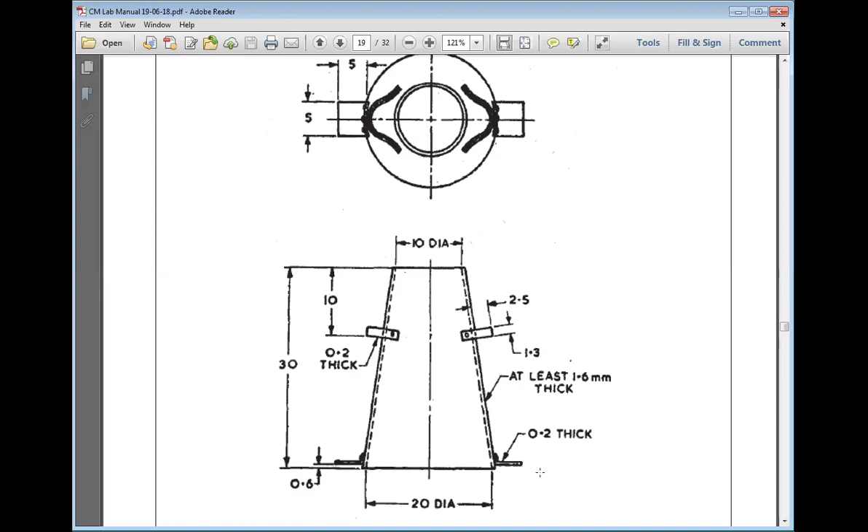Regarding the procedure, when we measure workability, there is no standard limit or value as such, no particular fixed unit, but we approach each test with different units. For example, in a slump cone test, the answer will be in the form of mm. In the next experiment we'll also see workability, which will have a different unit.

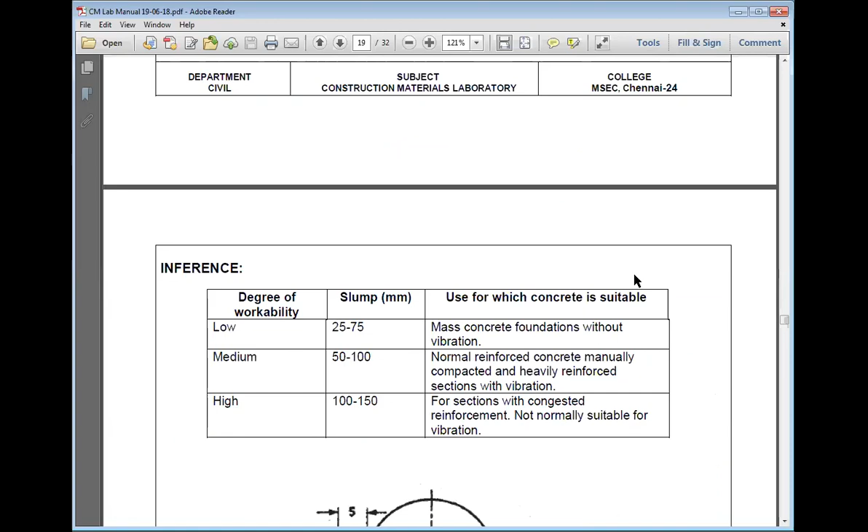Before that, let's revise the slump cone once more. What is the procedure involved?

In the selection of material, in terms of aggregate, the maximum size should not exceed 38 mm, and the internal surface of the mold should be cleaned before pouring the concrete. They clean it by pouring oil and wiping it.

After that you place it on a non-absorbent surface. Where the cone is placed, the flat surface should not have any impurities.

Now we can pour the fresh concrete in 4 layers. Just like how we fill the mold layer by layer and tamp 25 times for aggregate, here also we fill it in 4 layers. For each layer you need to do 25 tampings in order to induce the compaction.

After this is done, you level the surface. After leveling, you carefully remove the mold exactly vertically, because while removing the mold we should not disturb the concrete inside. Without disturbing it, you must lift it vertically.

In this case, depending on the workability level or stiffness, the concrete will subside, meaning it will fall. The measure of the fall is determined using a ruler, that is a scale. The difference in level between the height of the mold and the highest point of the subsided concrete is measured, as we've seen in pictures already. The unit is measured in mm, that is the height.

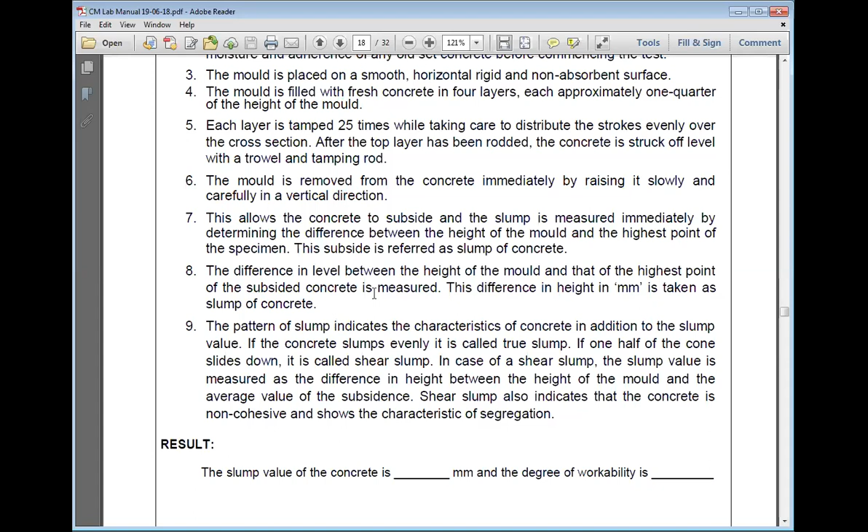Using this method, concrete slump can be categorized into 3 types. The first one is called true slump, the second is called shear slump, and the third is called collapse. Here we focus on the first two types.

What is true slump? If the concrete slumps evenly, it is called true slump. It does subside, but if it subsides evenly around the circumference, that is true slump. But if, in our frustum of cone, only one side slides down - that is, one half of the cone slides down, not the entire cone - then it is called a shear slump.

In that kind of case, when measuring the difference, you need to take the average value of subsidence in case of shear slump.

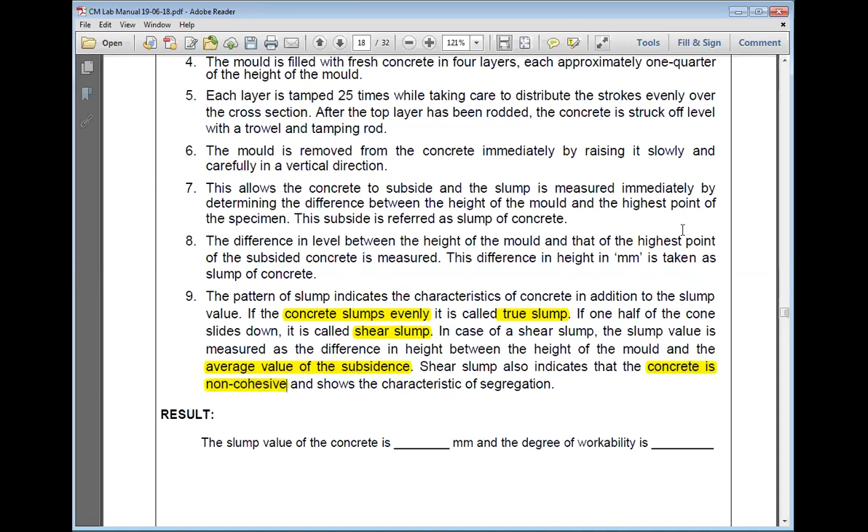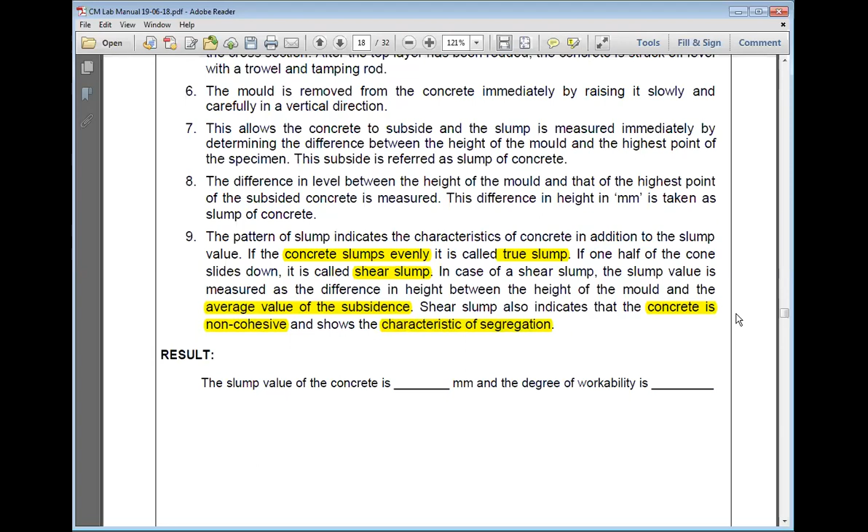What is the difference between true slump and shear slump? In terms of shear slump, it indicates that the concrete is non-cohesive, meaning it will not be sticky. In that situation, it signifies the characteristic of segregation. So we need to avoid shear slump while using the concrete.

True slump is what we must achieve. So what is true slump? The concrete cone should slump evenly. So when we write our result, we write: slump cone value is dash mm, and the degree of workability is dash.

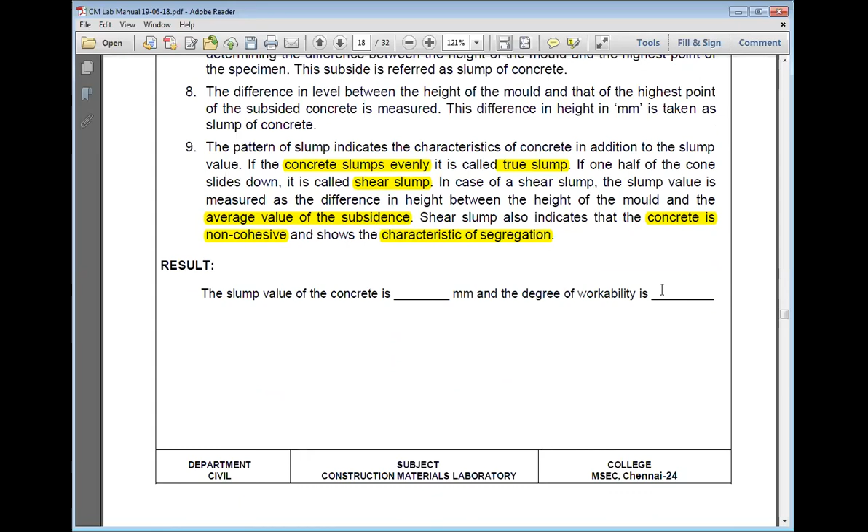In this place we need to mark the inference based on the slump value - what characteristic our concrete has, that is, whether the workability is high, moderate or poor, and so on.

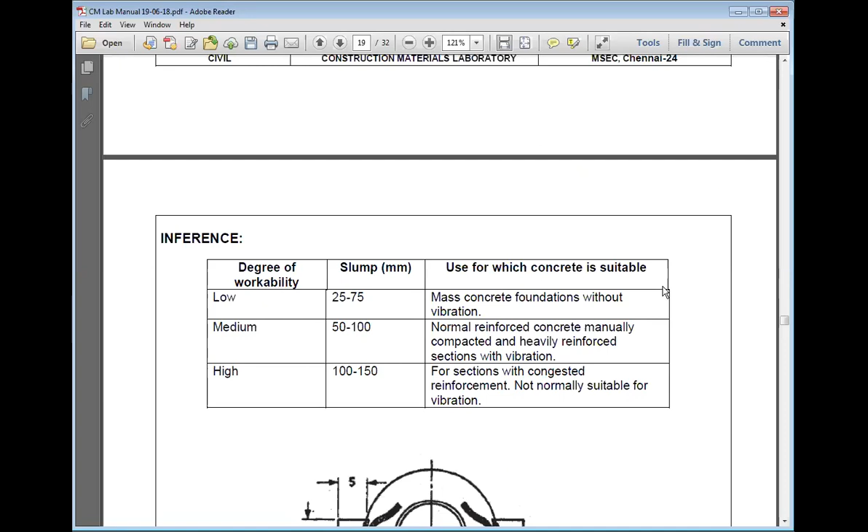In terms of application, a low workable concrete will have a slump of 25 up to 75 mm. There's a chance it can go up to 75 mm for a low workable concrete. In that, stiffness will obviously be higher.

Since stiffness is higher, you can use it in mass concrete foundations without vibration. In a medium workable concrete, it is around 50 to 100, which can be used in reinforced cement concrete, and we can do manual compaction. In heavy reinforcement, we can do vibrations.

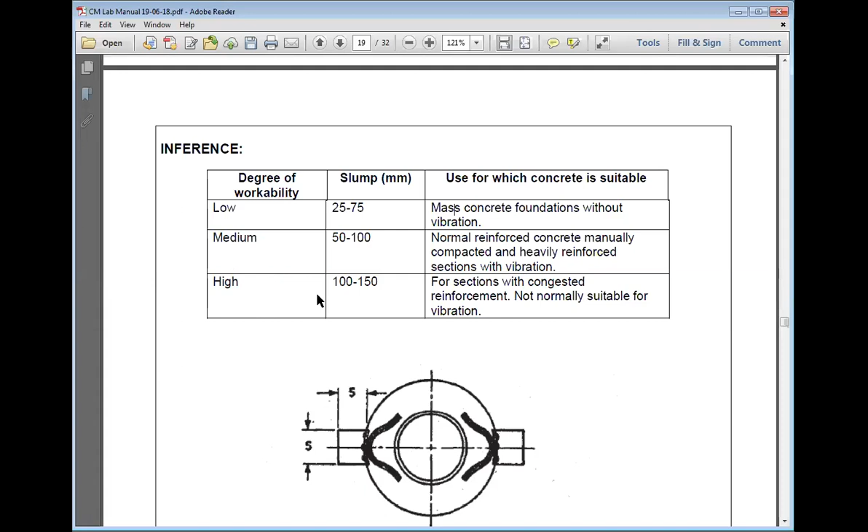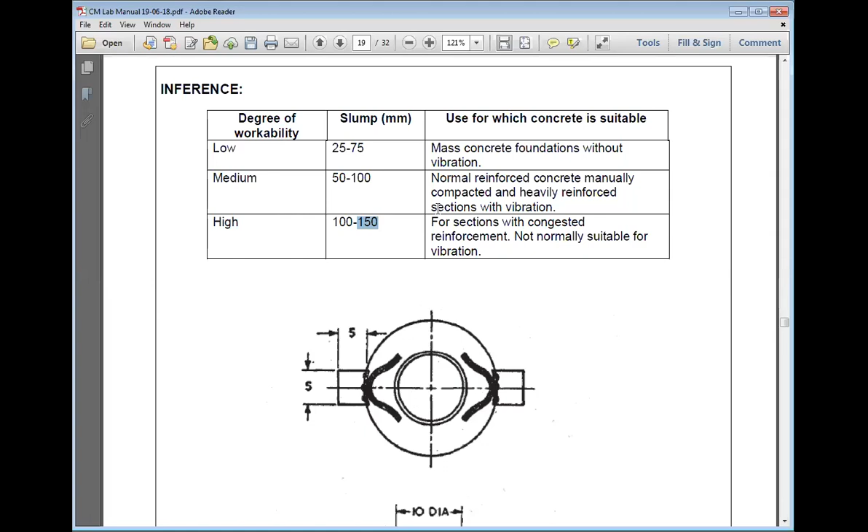In case of high workability, the slump value will be more, 100 to 150 mm. The slump cone's maximum height is 30 cm, that is 300mm. When we fill concrete in a 300mm cone, up to maximum 150mm can subside, that is fall evenly - half of the height comes down. When it descends like that, the cone at the bottom spreads evenly and surrounds uniformly.

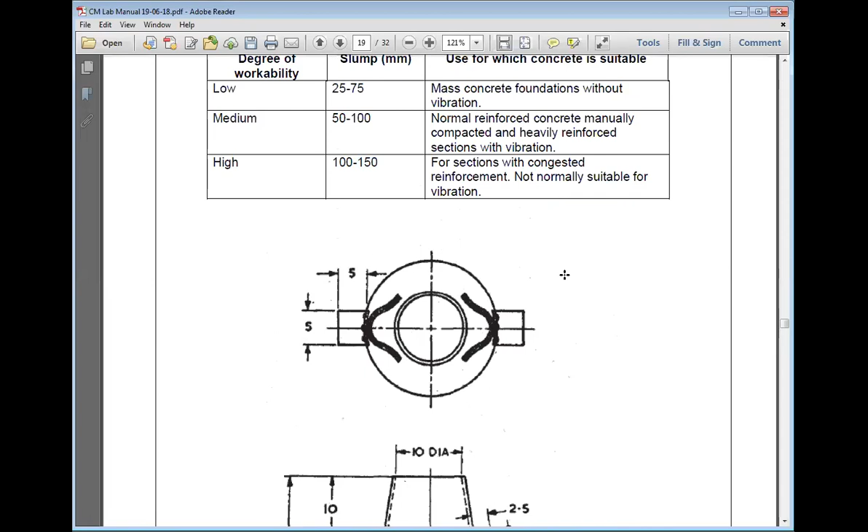In this case, it is normally not suitable for vibration because the concrete flows on its own. When it flows by itself, there is no necessity for vibration. This is how you interpret the slump cone test.

Workability has more than one test to measure the same property, as mentioned before. The impact of this is, while mixing the concrete mix design - what does that mean - for a grade of concrete we need to find the mix proportion: how much quantity of cement, fine aggregate, coarse aggregate and water required for concreting. To find that, knowing how much workability is needed is very important.

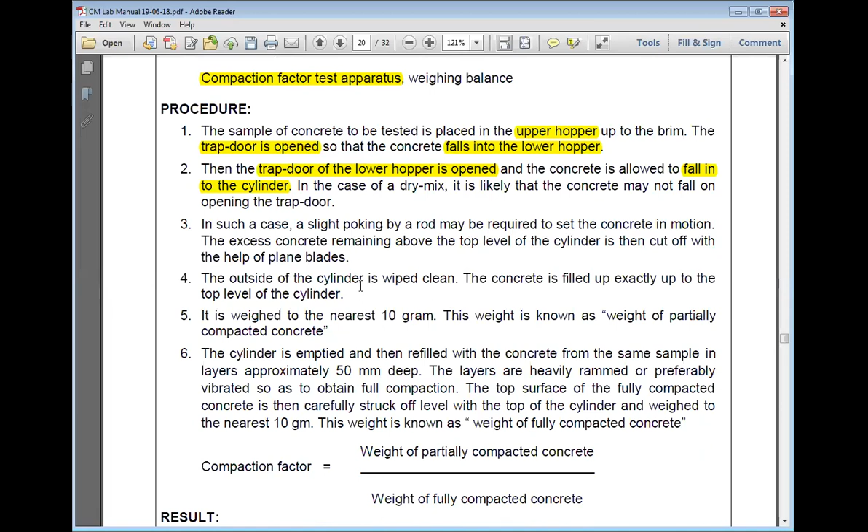This weight will be called partially compacted concrete. What is partially compacted concrete here? Since no vibration was given for full compaction, and the concrete fell only by gravitational force from the upper hopper, to the lower hopper, and then to the cylinder, the weight of concrete in the cylinder is the weight of partially compacted concrete.

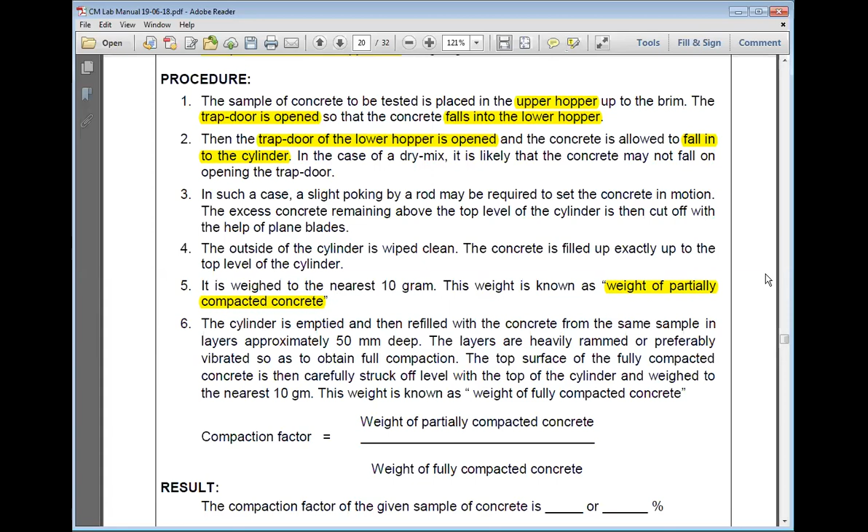So this parameter value should be taken as the numerator in our formula. Look at the compaction factor formula - the numerator is just the weight of partially compacted concrete. That is what we found as the numerator value.

Then what is the denominator? Weight of fully compacted concrete. To find this denominator we need to continue our experiment with a second trial.

But when doing the second trial, there is a difference. Instead of partially compacting the concrete, you are going to compact it manually so that after vibrations or tamping, the concrete obtains full compaction. You are ensuring full compaction - that is, as the concrete falls into the cylinder, you are tamping it 25 times.

In the second trial, instead of using the upper hopper and lower hopper, you take the same concrete and, similar to how we tamp the slump cone 25 times in 4 layers while filling, you perform the manual compaction process to obtain full compaction.

In this case, you are going to measure some weight, right? That will be called the weight of fully compacted concrete.

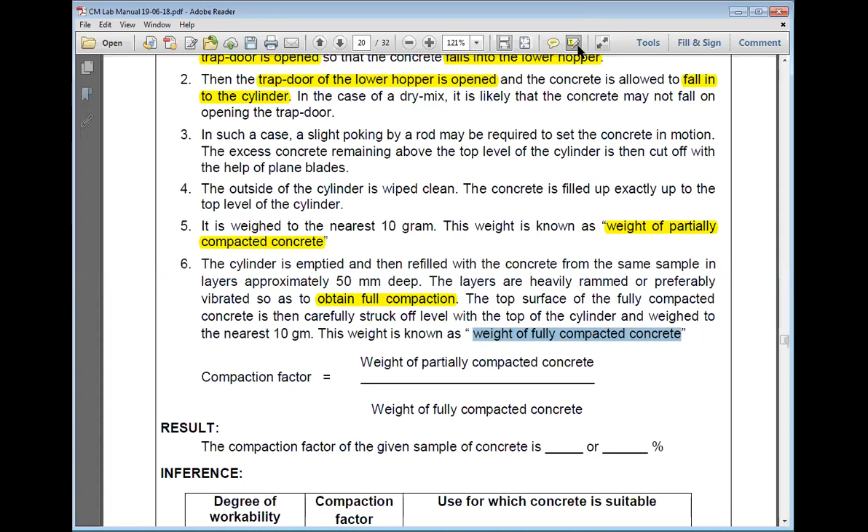So to find the numerator, we use the entire apparatus - upper hopper, lower hopper and cylinder. To find the denominator, we only need the cylinder - we don't need the upper hopper or lower hopper. We fill concrete manually in the cylinder and tamp it 25 times to find the weight of fully compacted concrete.

Now, depending on the stiffness or workability of the concrete, your compaction factor value will vary. Correct? For example, if your concrete is dry, will the compaction factor be more or less?

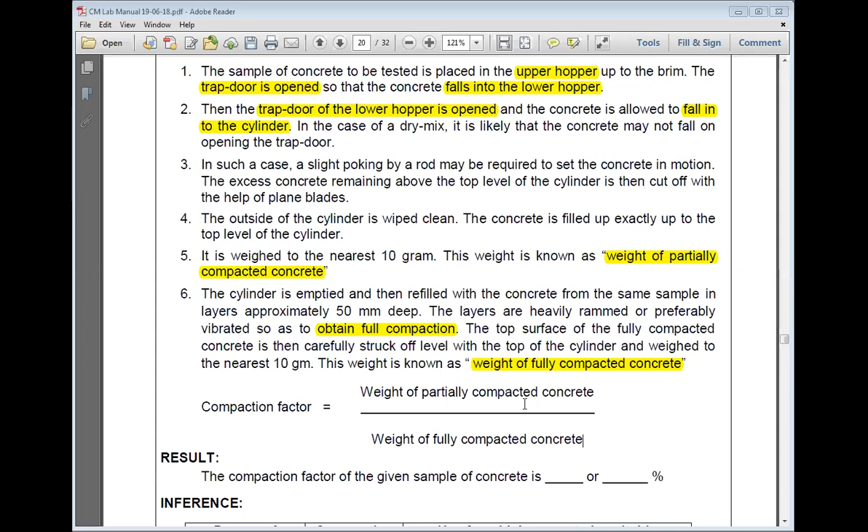So here, based on the degree of workability or the compaction factor value, let's see what the degree of workability is and in which cases it is applied. Your value may range between 0.75 to 0.95 or 0.96. These are typical values given here for understanding. For example, if your concrete's compaction factor is 0.80, the degree of workability is very low.

What does that mean? Compared to full compaction, only 80% of partial compaction was achieved. That is the meaning - full compaction means 100%, and compared to that, partial compaction achieved only 80%.

If your value is above 0.85, the degree of workability is comparatively low. For 0.935, that is above 0.9, the degree of workability is medium. And if your concrete workability compaction factor is around 0.95, then the degree of workability is high.

In terms of vibration for compaction, a very low workable concrete can be used in roads with power operated machines since the stiffness is high. A low workable concrete can be applied in mass concrete without vibrations. Medium workable concrete is for reinforced cement concrete, and high workable concrete is for congested reinforcement without vibrations.

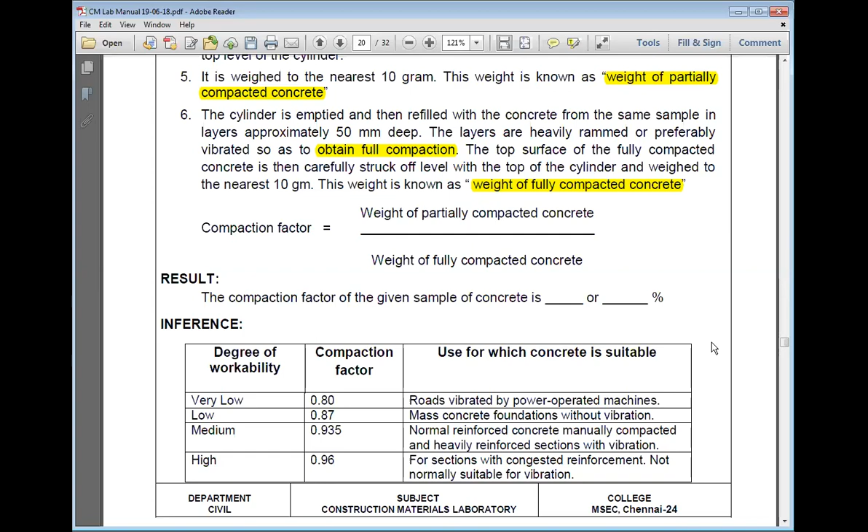So all these values are typical to understand the level of workability, how it varies, and the application area. This is how they may ask in Viva based on applications. And certainly about limitations of the test, they may definitely ask in Viva, or the significance of the test.

In terms of significance, you can say that compaction factor doesn't need to be used much; if it's for mix design, the slump cone test is primarily enough. And in terms of ease of use, slump cone is a much easier test when compared to compaction factor.

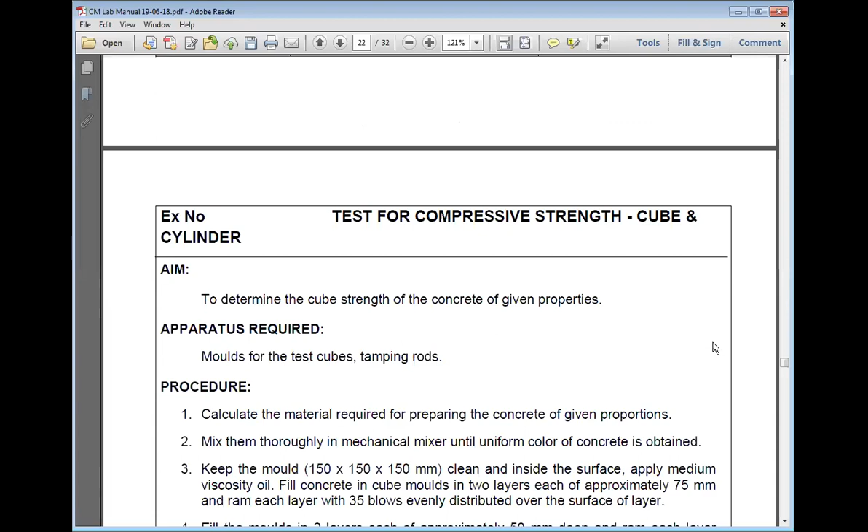Apart from that, the two tests we looked at are based on fresh concrete while it is in a plastic state. Suppose your concrete is in a hardened state, then what can we check? Compressive strength.

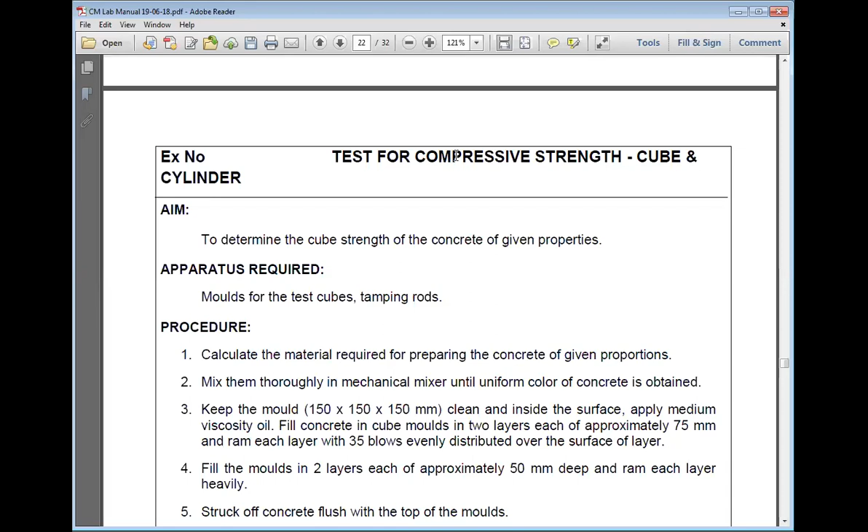Already you saw pictures many times, right? While applying the compressive load on the CTM machine between the compressive plates, you take a cube mold of 15 centimeter size, so a 15 by 15 by 15 cube is taken. In terms of mm, it is 150.

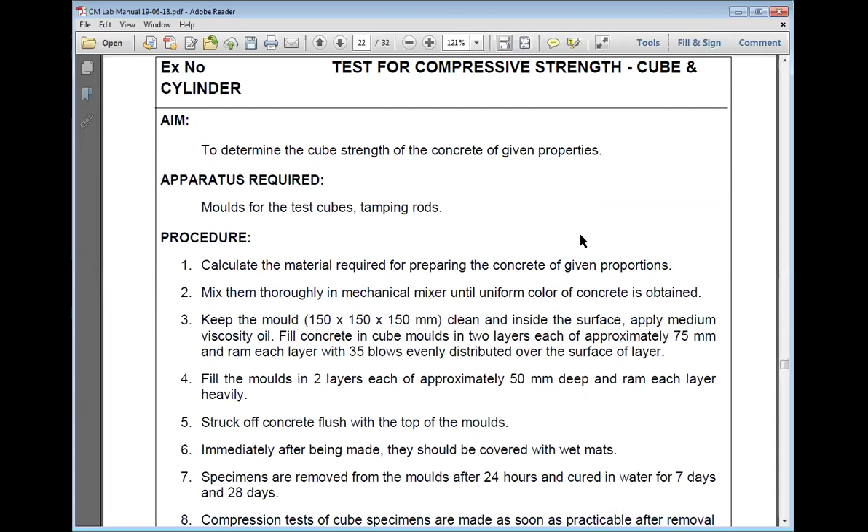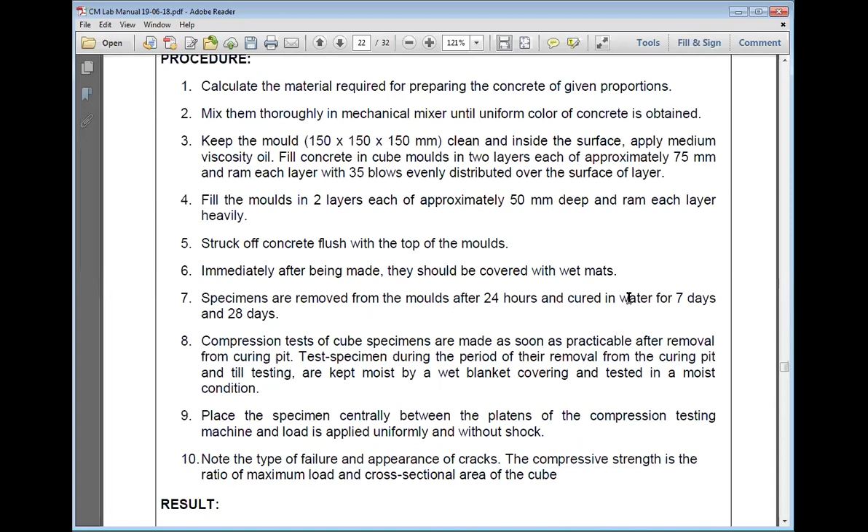So for that you take a mold. In that mold you fill the concrete, then you have to tamp it, compact it, then cure it. First at room temperature for 24 hours, then the remaining days in immersion of water. After that, you take the test specimen out and check it in the CTM machine.

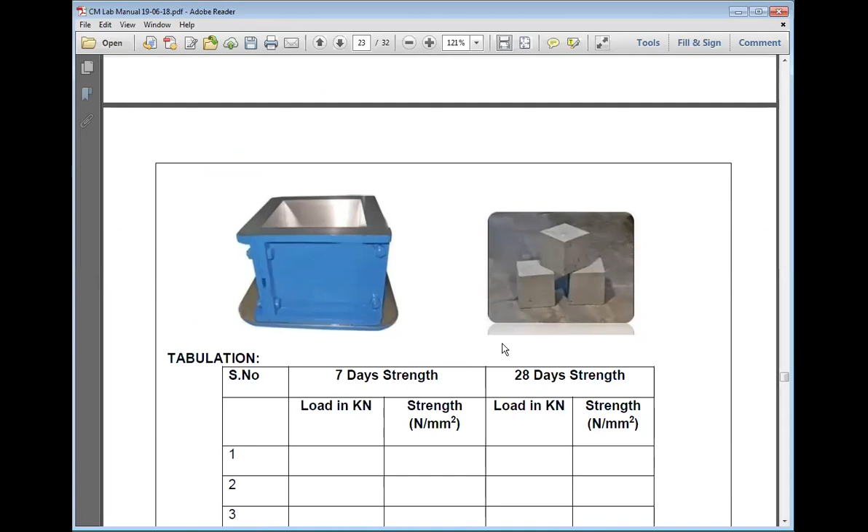For the tabulation, look at those pictures - on the left is the cube mold, on the right is molded concrete cubes after curing. So you take the load and values in kilonewton and the strength in Newton per mm square. For that we need the top area of the cube mold, which is 15 by 15 centimeter, or in mm, 150 mm by 150 mm.

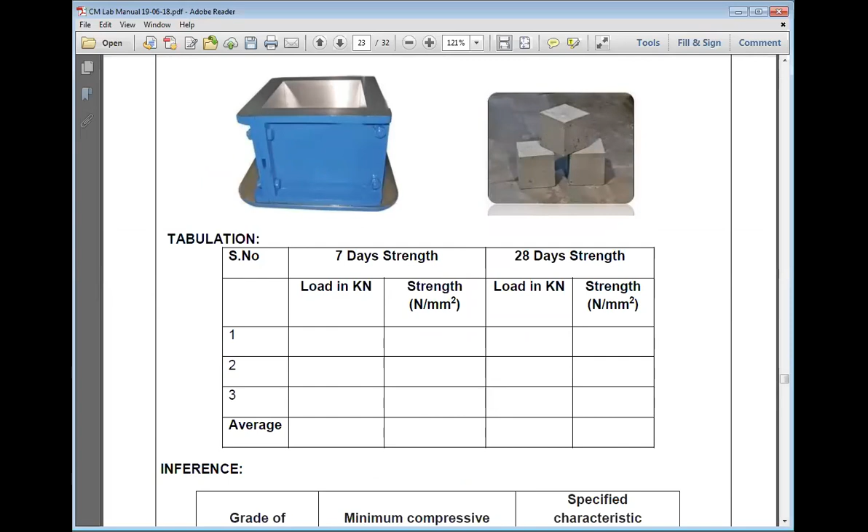In terms of grade of concrete, what strength should be obtained at 28 days? It is something with the same value as the grade. If you take 15, here also it will be 15. Suppose you take 35, here also it will be 35. That is for 28 day average compressive strength.

Now regarding minimum compressive strength at 7 days - since we cannot wait until 28 days, we check what value we get on the 7th day itself. If the value is within satisfactory limit, then automatically we can ensure that at 28 days also we will get the corresponding value.

For example, if you take M20 grade concrete, after 28 days you should get 20 Newton per mm square strength. But at the 7th day, you should get a minimum strength of 13.5. So suppose I take a 7 day cube, do 7 day curing and then test it - at that point of time, I should get a value of minimum 13.5 or more than that. That would ensure that after 28 days, we will get the required grade strength.

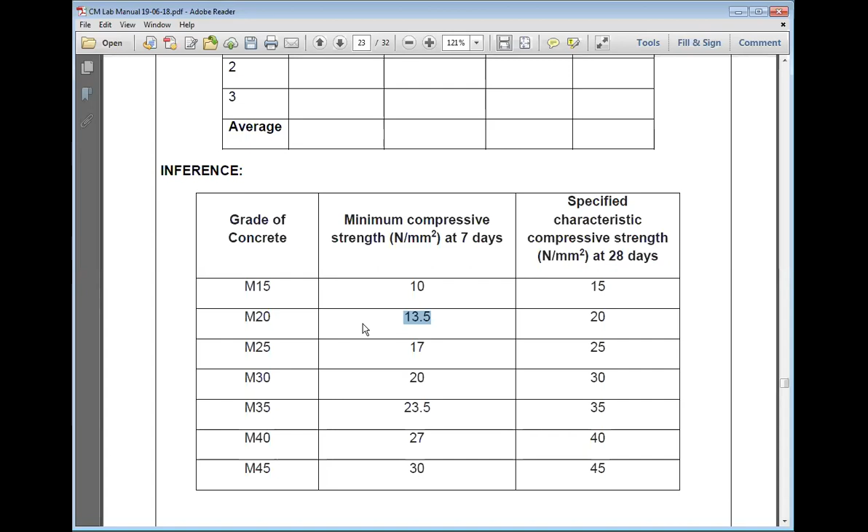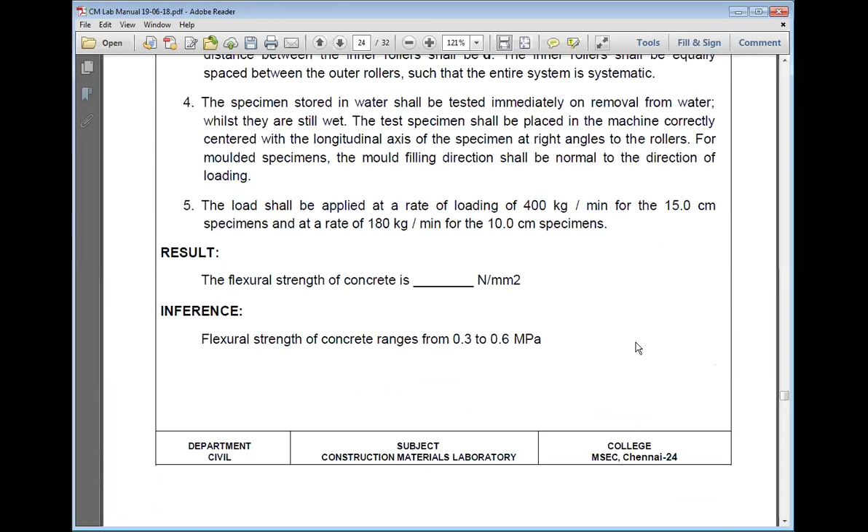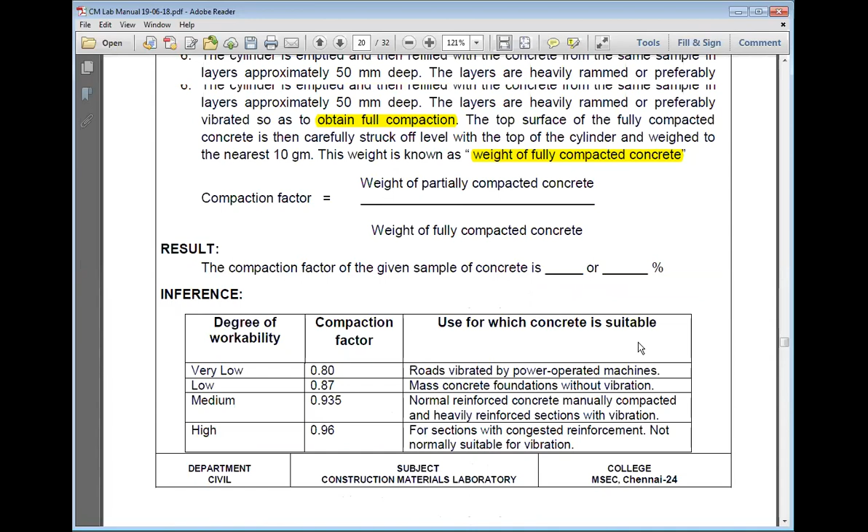Then another test regarding concrete is the beam test, that is the flexural strength test. We will discuss this later in detail, because we have some other methods of testing workability apart from slump cone and compaction factor. As far as the lab is concerned, only two methods exist - one is slump cone method, the other is compaction factor method for workability. Now we will see an overview of other methods.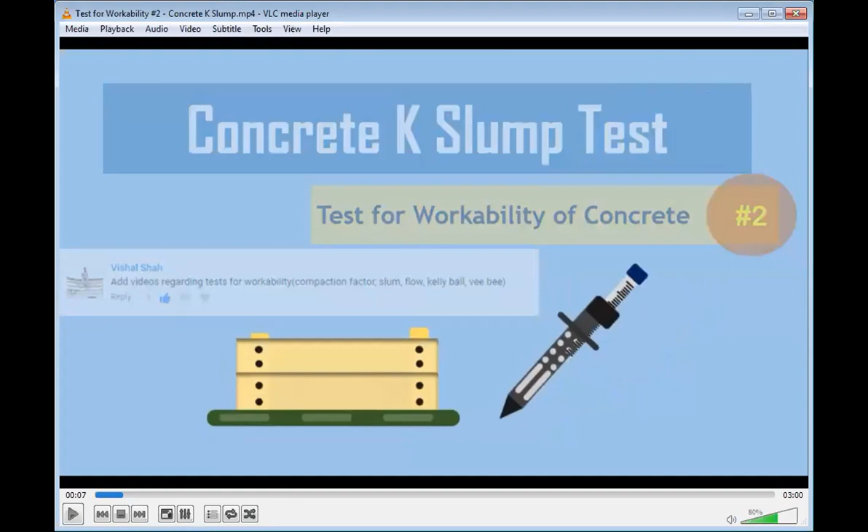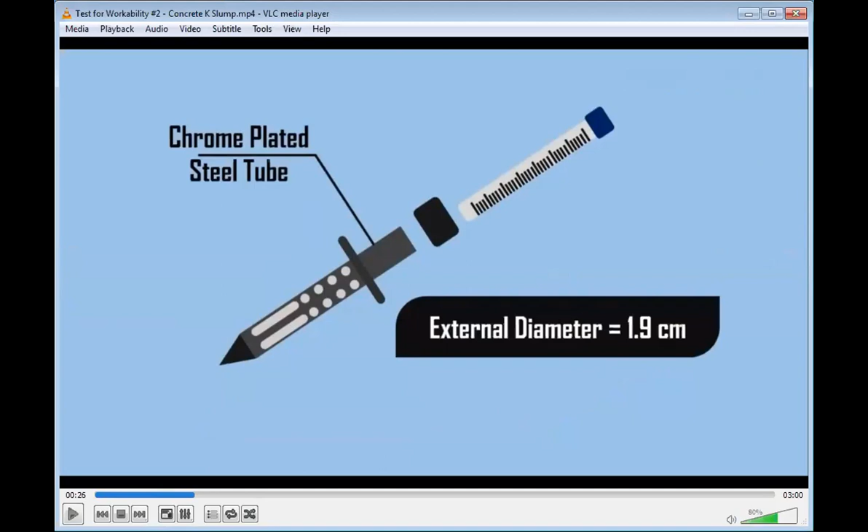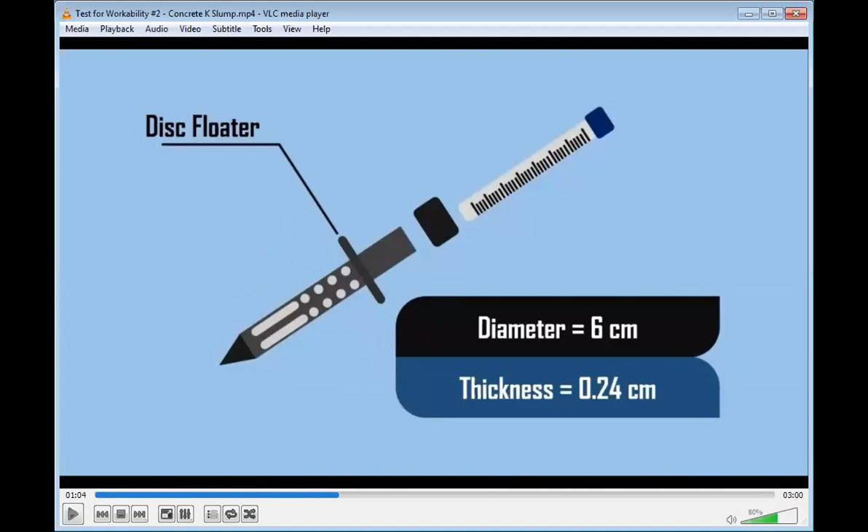So what do we have? A chrome plated steel tube of 1.9 cm. We won't focus much on the manual physical specifications, we'll focus on the main application. So it has a 25 cm depth, and at the bottom we have needle type arrangements, and also a disc floater of a particular 6 cm diameter and thickness.

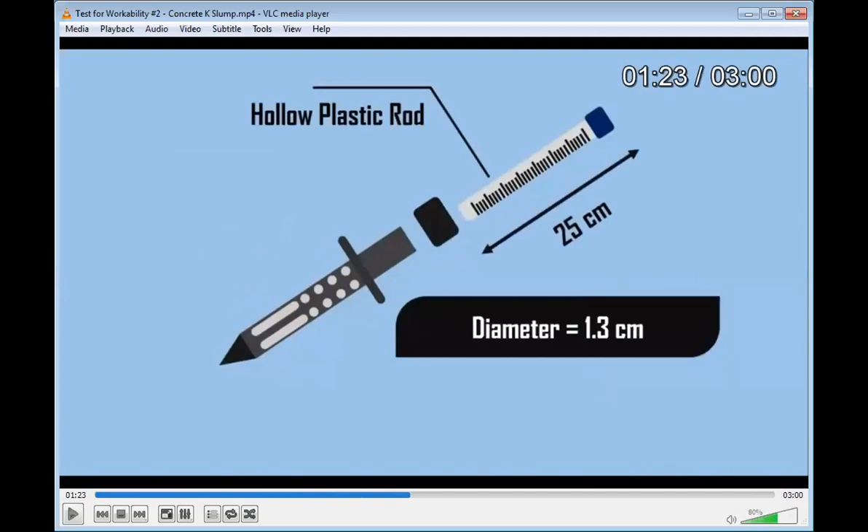So what we are going to do is, we also have a hollow plastic rod of 25 cm and aluminum cap of 3 cm. So we have a tube, float tube, aluminum cap, and the measuring gauge - that is a scale fitted inside.

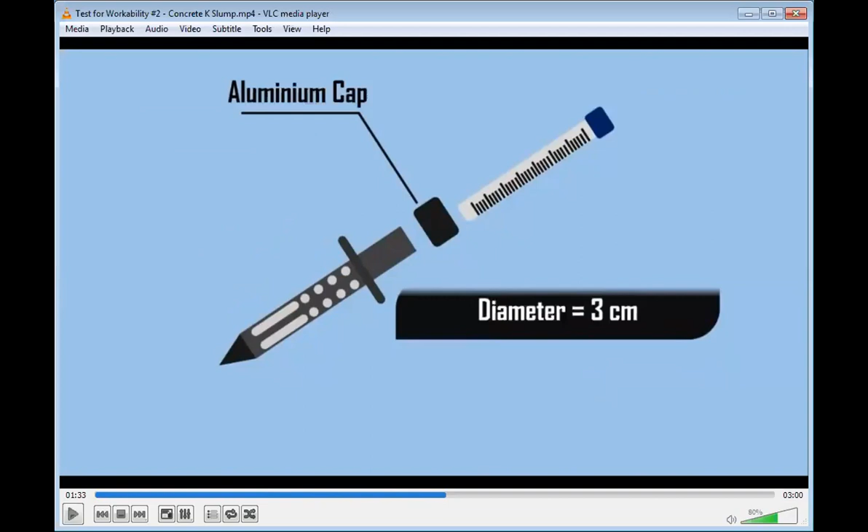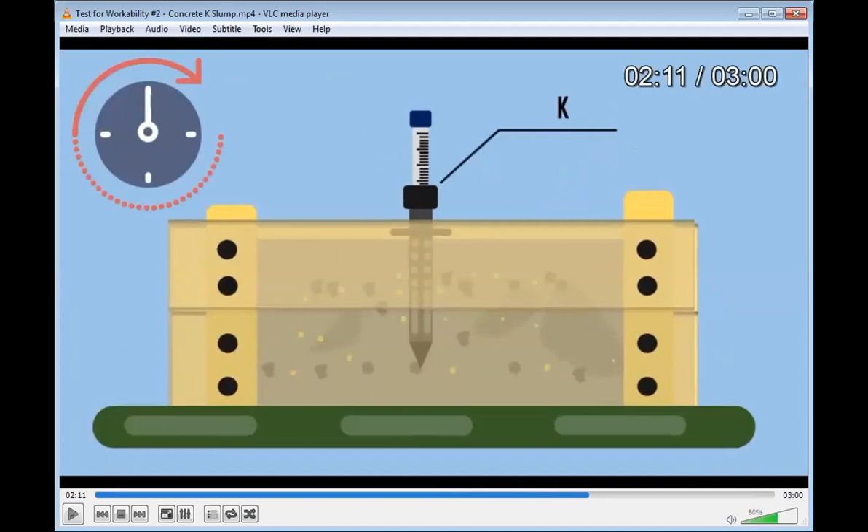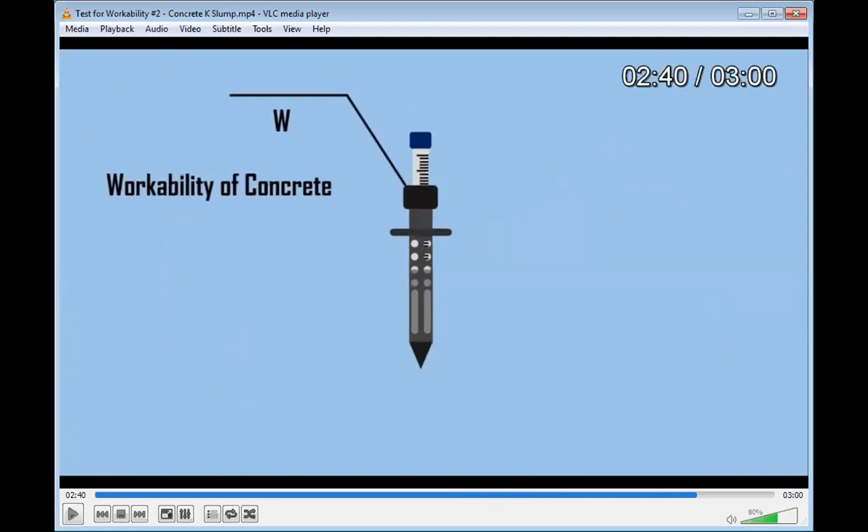So there is a penetration reading - based on the reading, they measure the workability, relating the depth of penetration with the workability level of concrete. If your concrete is in a fluid state, penetration will be higher, correct? That is the key advantage in this concept.

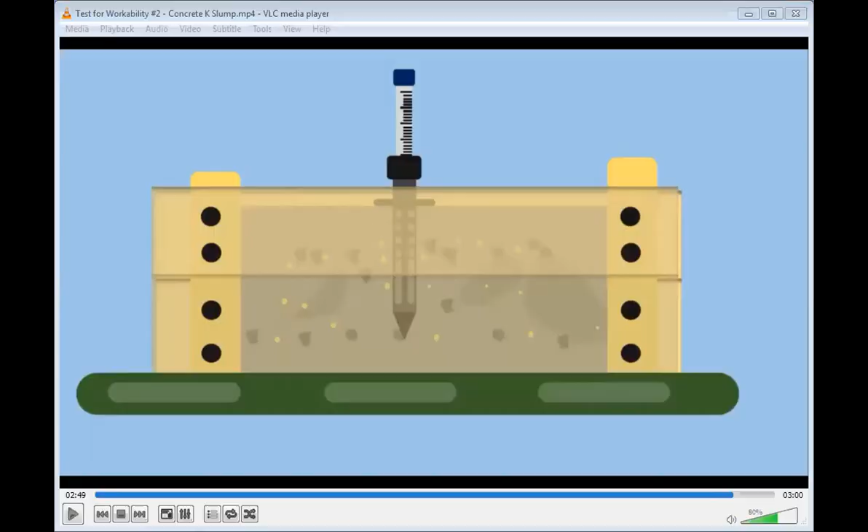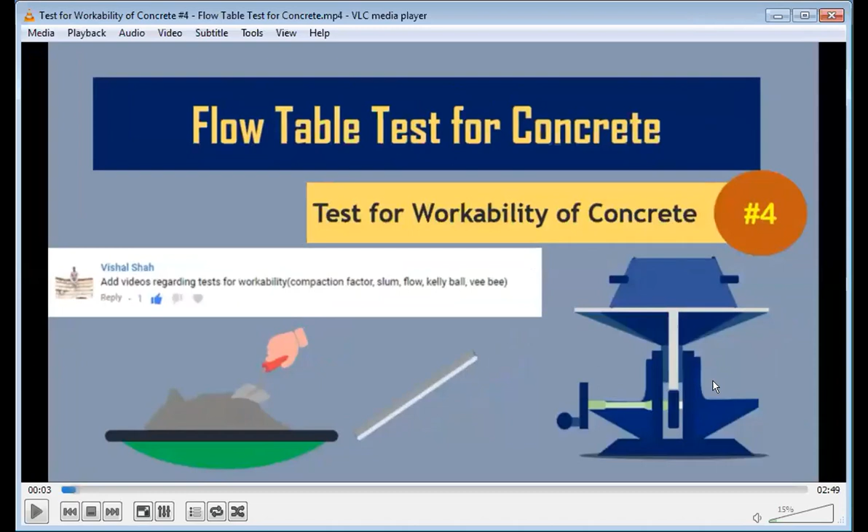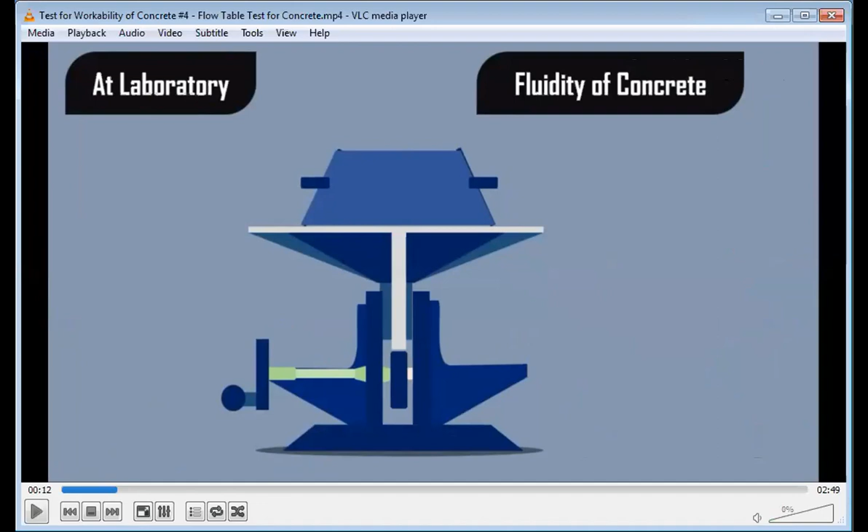Next we have a famous type of test called the flow table test. This was used in a lot of places earlier. This is a laboratory test to measure the fluidity - that is, to what extent the concrete will spread. Now we mentioned the slump cone - once the concrete subsides, obviously it spreads on the floor. To what extent that flowability exists, that fluidity is checked through this apparatus.

Here we have a base area of 25 cm, upper surface diameter of 17 cm, and height of 12 cm. In this shape we have the cone. And you can see the top view, and there are concentric rings from the center, which indicate: to measure the spread of concrete across various directions.

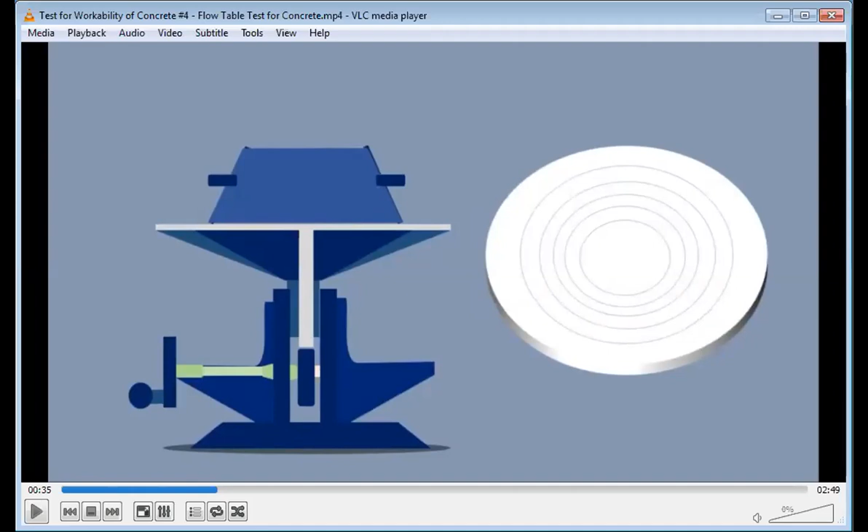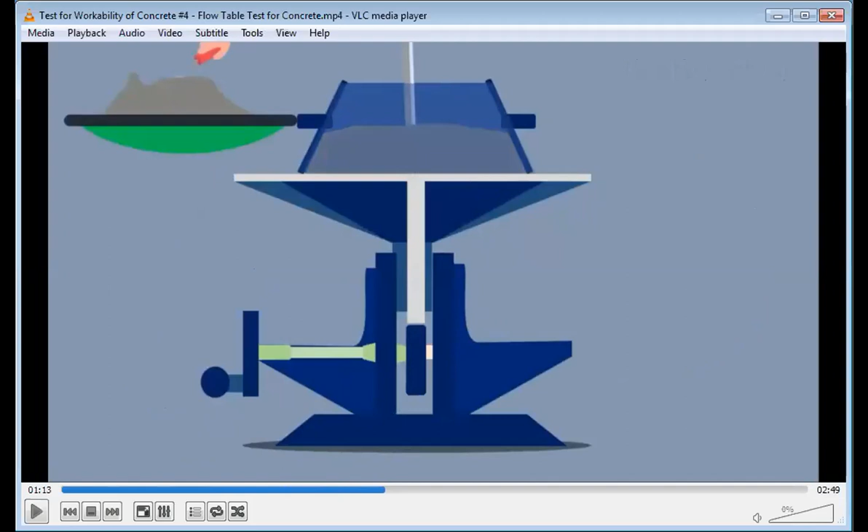So you wipe and clean the surface, then place the cone above, fill the concrete in layers, tamp it 25 times, then remove the cone. This is as usual like how we saw in the slump cone, but in this the reading measurement methodology changes.

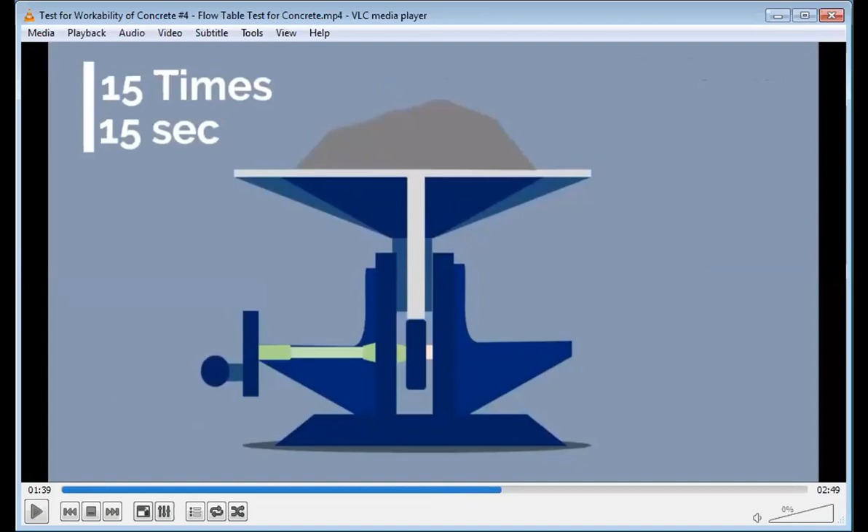At the bottom we have a jerks arrangement, which is used to vibrate the tables using a pulley arrangement. You're going to vibrate the tables 15 times in 15 seconds, at that speed level you're going to do it. After completion, what happens?

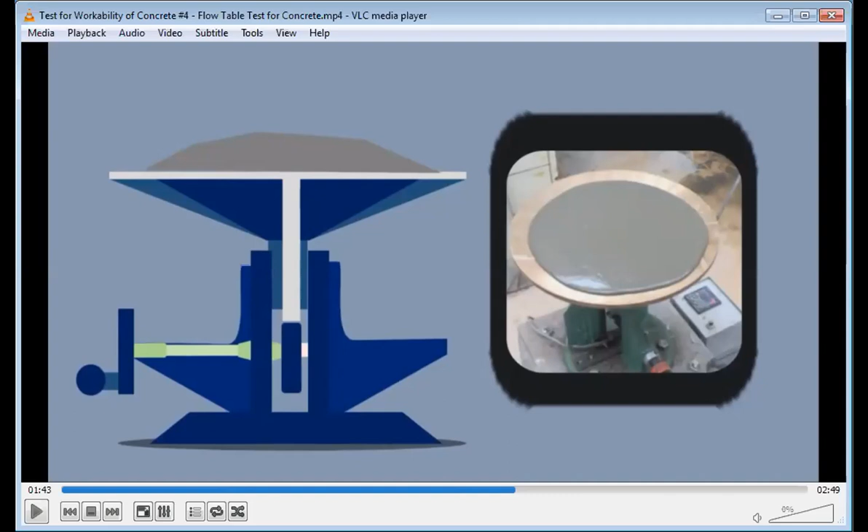Your concrete will subside and spread on the circular disc floor, almost in all directions. Depending on the consistency, the flow of spread will vary, so we are going to measure in all possible directions.

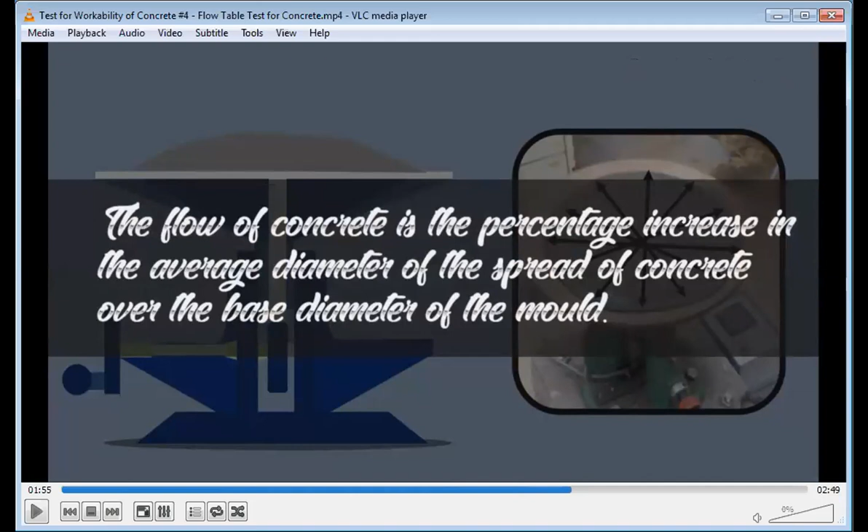The flow of concrete is a percentage increase in the average diameter of the spread of concrete over the base diameter of the mold. So here we say increase in average diameter. Why increase in average dia? If you previously saw the specification, the disc is 76 cm, but initially when concrete is poured, maximum diameter was 25 cm. So both the slump cone needs to be placed exactly at the center of the circular disc.

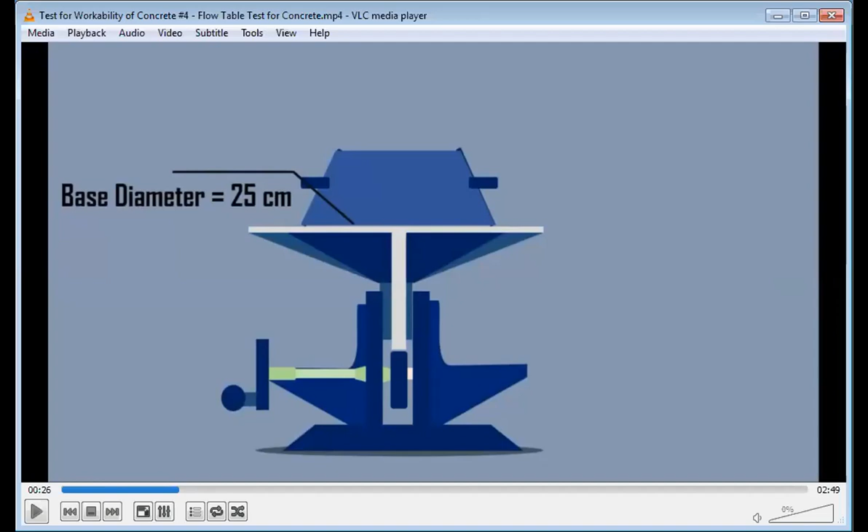Okay, so let's see what the formula is for this. Now you'll better understand why the value 25 is included in the formula. The flow in terms of percentage is expressed as spread diameter in centimeter minus 25, divided by 25, into 100.

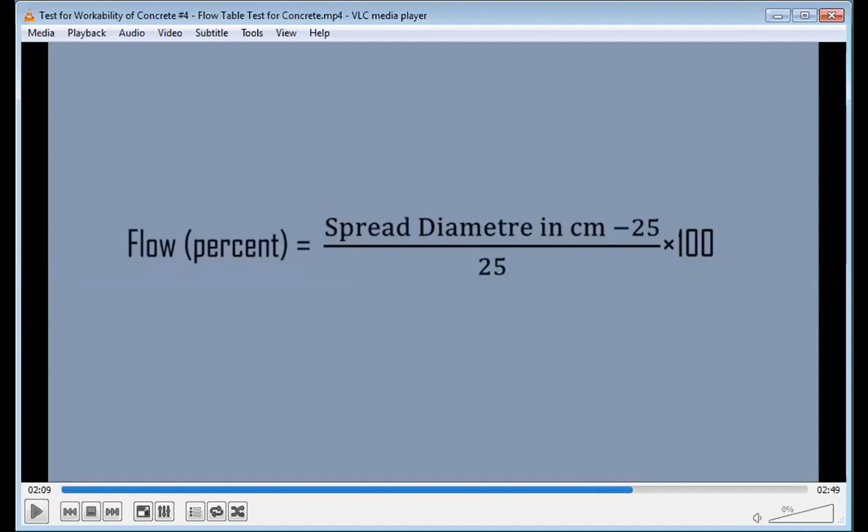So here, what do we mean by the value 25? What does it represent? What is 1 by 25? What does it represent? 25 - what dimension is that in the apparatus? Answer this, don't stay silent, answer whatever you think.

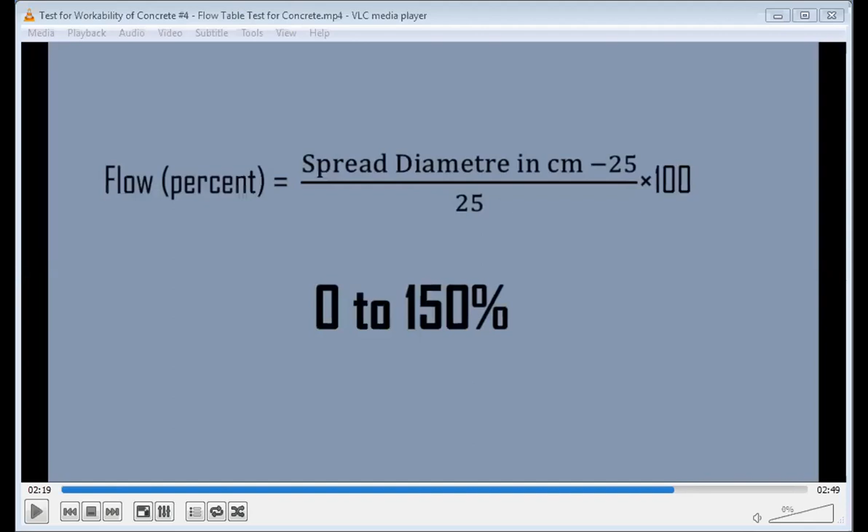150% means it has spread more beyond the limit. So it is used to study the characteristic of concrete and the tendency for segregation. That is how this method is approached.

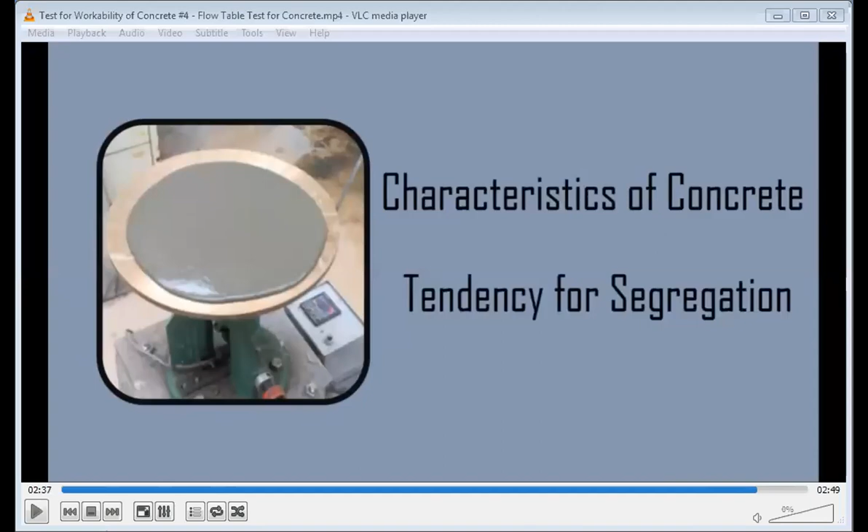And the next test we'll see is the Vee-Bee consistometer test. We will see what is the Vee-Bee consistometer. So here it is the Vee-Bee consistometer.

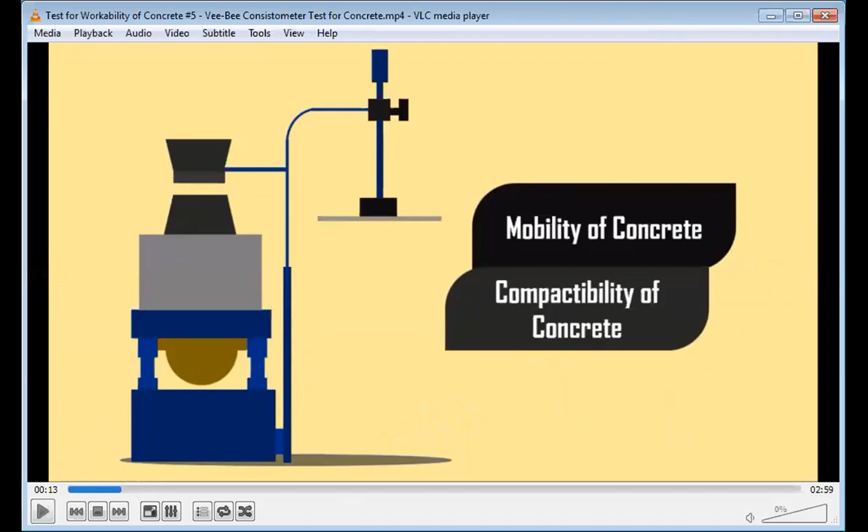It is directly measuring the consistency - the apparatus first represents the mobility of concrete or the compactability of concrete. Mobility means how easily it flows in case of transportation, and compactability means how easily it can be compacted.

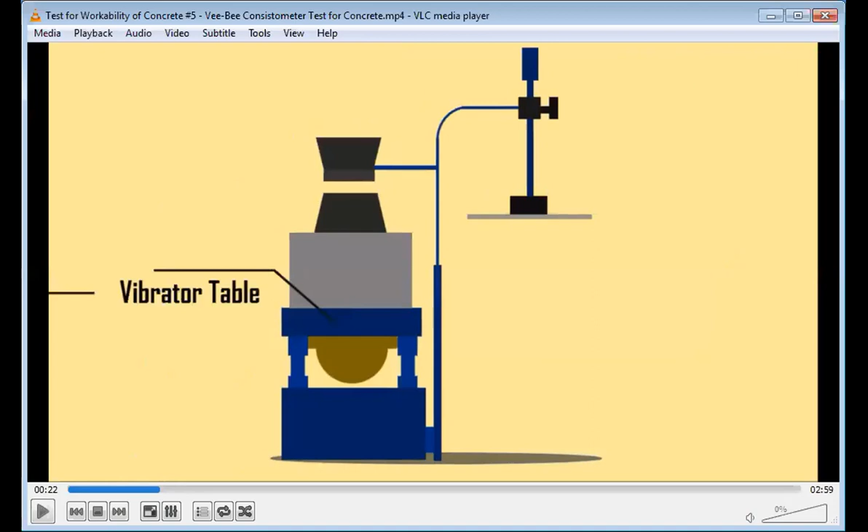The Vee-Bee consistometer apparatus has a vibrator table at the bottom, like how you saw in the manufacturing process. The same kind of apparatus is at the bottom, and at the top we have a sheet metal.

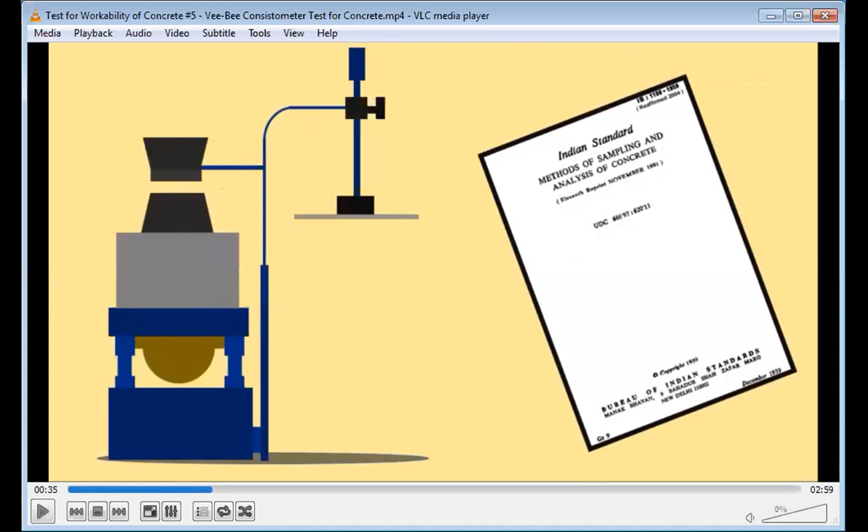Here too, it's a slump cone, correct? Bottom diameter is more, top diameter is less. We have a slump cone and it is inside a cuboid or a cube. A slump cone is placed and fixed inside a cube. Apart from that, we have a glass disc.

And for every experiment, we have separate Indian standard codes. So concrete is filled in layers and tamped 25 times. Up to this point - concrete is filled only in the slump cone, not in the cube.

But after this, you're going to rotate the glass disc and place it on top of the slump cone. Then it's closed on top.

We are going to adjust the lever on the top of the glass disc. And after that, we are removing the slump cone, and we are going to...

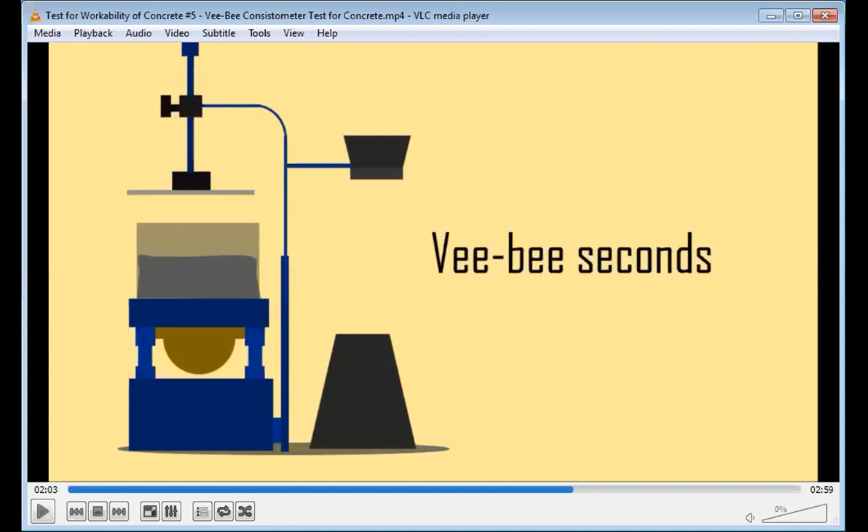And you are going to measure the time in this experiment. Instead of height, instead of the graduation scale, you are going to measure the time taken for the concrete to subside and completely fall into the cube present inside.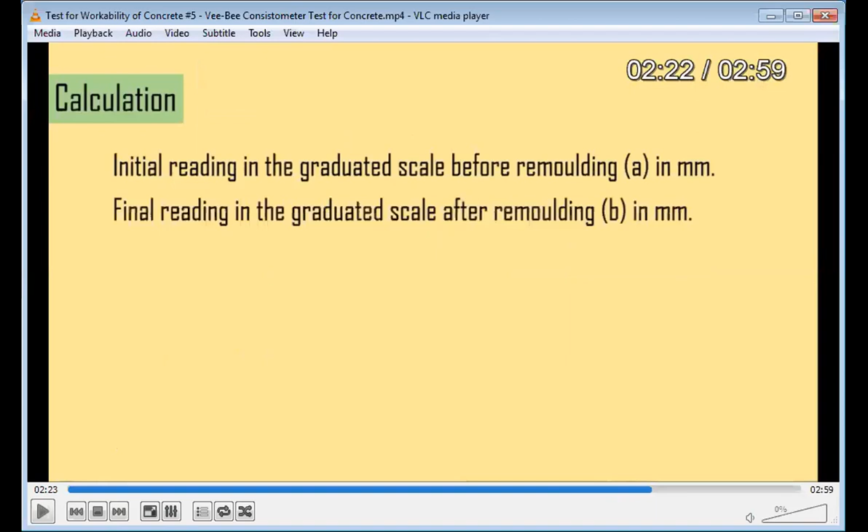Technically speaking, initial reading in the graduated scale before remolding is A, then final reading in the graduated scale after remolding is B. Now we can find the slump value from this, correct? Apart from that, consistency is measured in VB seconds - how much time is taken for the concrete to completely subside and fall into the cube.

So time taken will be very less for a plastic concrete, that is wet mix concrete. If your concrete's stiffness is very high, the time taken in seconds will also be more. And for extremely dry concrete, using this apparatus, it may take up to 32 seconds to complete the experiment.

So based on that, you can check the characteristic of concrete in terms of workability. So this is one method.

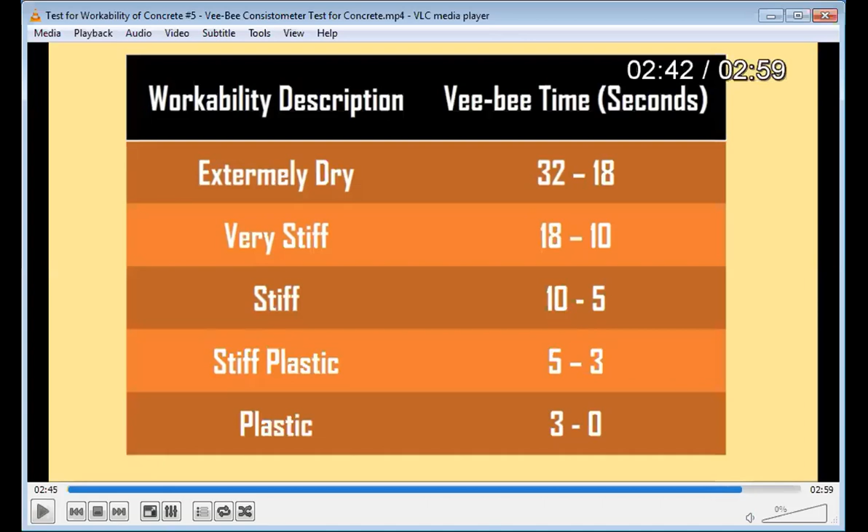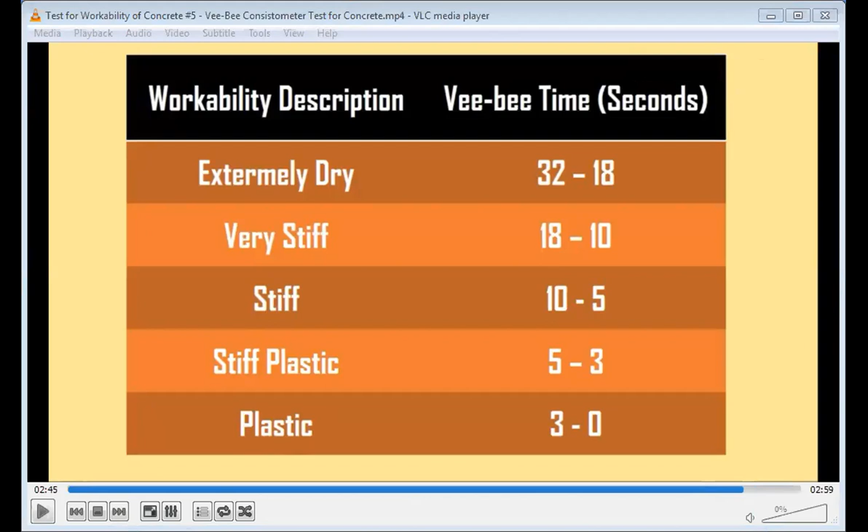And lastly, we are going to see about the Kelly ball test. Okay, or else we will continue this in the next class.